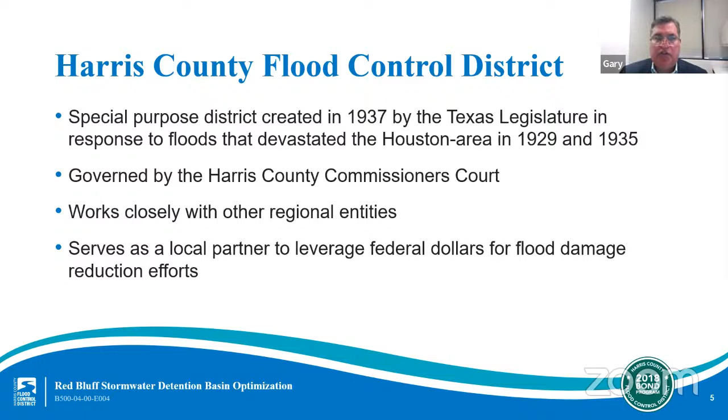The mission of the Harris County Flood Control District is to provide flood damage reduction projects that work with appropriate regard for community and natural values. One of the most difficult challenges we face is constructing effective projects that are sensitive to community and natural values in a highly urbanized area.

Harris County includes 23 main watersheds, totaling approximately 1,800 square miles and more than 2,500 linear miles of channel. 2,500 miles is approximately the distance from New York to California. A watershed is a geographical region of land that drains to a common channel or outlet. Each watershed has its own unique characteristics and needs. The project we are presenting tonight is in the Armand Bayou watershed that is located in southeast Harris County.

Harris County and our surrounding area is flood prone for a number of reasons. Namely, we experience extreme rainfall events, including tropical storms and hurricanes. Our area is largely made up of flat, slow draining land. And we see large concentrations of clay soils that do not soak up excess rainfall quickly.

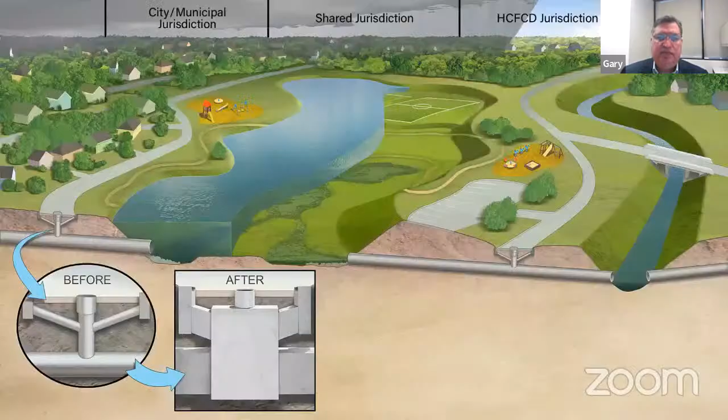While the Flood Control District plays a critical role in flood risk reduction, we are one of several entities involved in these efforts in our region. When rain falls on your roof, it flows through several jurisdictions, such as streets and drains managed by the Harris County Engineering Department, a municipal utility district, or a city, such as the City of Houston, before it flows into a larger channel, creek, or bayou that the Flood Control District owns and maintains. This slide illustrates the various jurisdictions, which sometimes we even share with other entities.

Inside neighborhoods, as shown on the left side of this illustration, storm sewers and roadside ditches collect stormwater runoff and start the process of moving it away from homes and streets. Storm sewers and roadside ditches are the responsibility of the underlying municipality. The larger bayous and channels that take the collected stormwater and move it through our drainage system to Galveston Bay are the responsibility of the Flood Control District. This is shown on the right side of the illustration.

In the middle is a stormwater detention basin, sometimes constructed by the Flood Control District. When storm sewers on the left are increased, this creates an increase in runoff. Since it is our policy to avoid any adverse impacts from our projects, detention basins help to safely take in and temporarily store excess stormwater during heavy rain events. Often, we partner with Harris County precincts, utility districts, and others to add recreational amenities such as trails to these basins and along our channels.

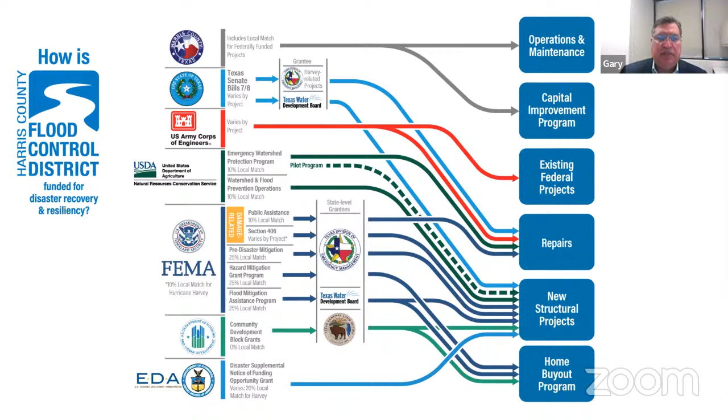We will now move into the part of the program that is specifically about the Armand Bayou watershed and the Red Bluff Stormwater Detention Basin Optimization Project. As a reminder, we are looking for your input as we discuss the project in more detail. Please feel free to drop any questions or comments into the comment box or to comment via phone by pushing the star key.

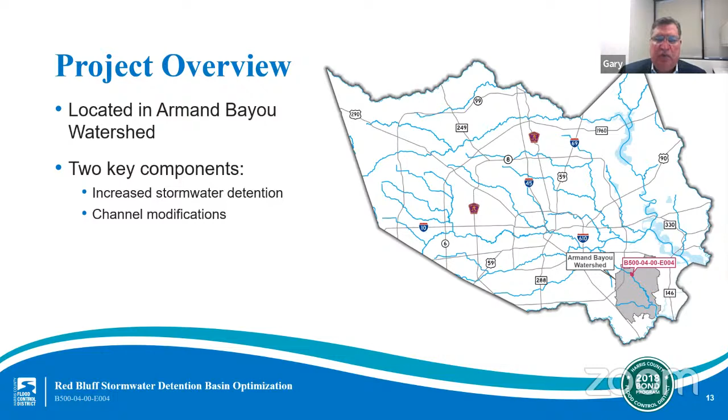This project involves the optimization of an existing stormwater detention basin in the Armand Bayou watershed, the Red Bluff Stormwater Detention Basin, formally identified as HCFCD Unit B500-04-00, in conjunction with potential channel modifications to tributary B115-00-00. The project will examine ways to make the most effective use of the basin in connection with future stormwater conveyance improvements to reduce flood risks in the area. At this point in the project, both components will be examined, but only the detention basin will move forward immediately to design.

Taking a watershed-wide approach to planning ensures that future flood risk reduction projects work together and are sequenced appropriately to achieve the maximum benefits. Planners worked with Harris County, municipalities, including the cities of Pasadena, Deer Park, LaPorte, and Houston, and other agencies, both to clarify flooding issues in the watershed and to improve coordination between flood control district regional projects and future local projects.

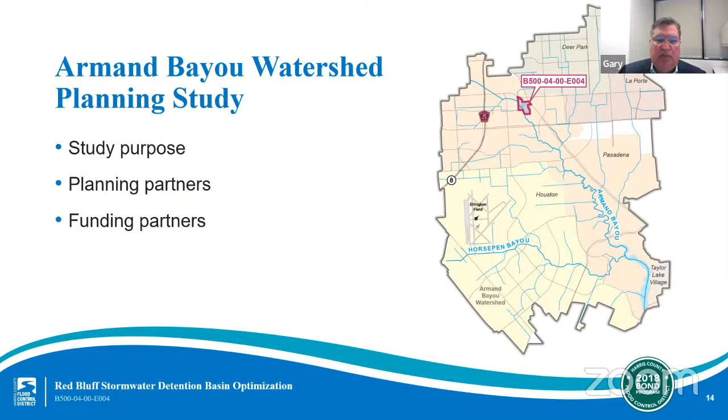The Armand Bayou Watershed Planning Study identified and evaluated 39 locations with significant drainage or flooding problems. The primary sources for flooding of structures in the watershed include a combination of local storm sewer network limitations, limited channel stormwater conveyance capacity, and off-site flow from adjacent subareas.

The study identified 3 major problem areas in the watershed. These include portions of the following subwatersheds: Horsepen Bayou, or B104-00-00, Willow Spring Creek, otherwise known as B112-00-00, and finally tributaries B114-00-00 and B115-00-00, with associated areas of the Armand Bayou main stem, which we classify as B100-00-00.

Once existing and potential future problems were identified across the watershed, the study team refined conceptual solutions for top-tier problem areas to select projects for prioritization. The most promising project recommended for the Armand Bayou watershed focuses on improvements to tributary B115 and surrounding areas, which is what we are here to discuss today. The project includes 2 components: channel modifications to tributary B115 to improve stormwater conveyance, and increased stormwater detention to prevent downstream impacts. Again, we will show this in more detail shortly.

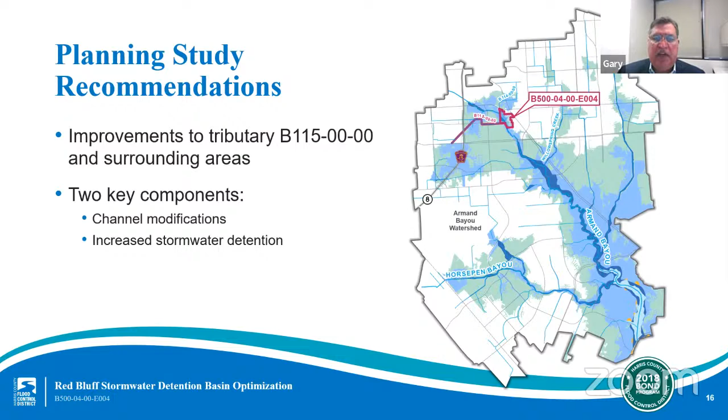Before we do, I'd like to pause and take a moment to provide an overview on these 2 flood mitigation tools. Channel modifications have long been used by the Flood Control District and other entities to reduce the risk of flooding by improving the ability of the channel to move stormwater out of an area. This can be accomplished by widening, deepening, and/or straightening the channel, or by lining the channel with various materials.

Maintenance projects to remove woody vegetation or accumulated sediment can also restore the channel's ability to convey stormwater. Channel conveyance improvement projects often require additional stormwater detention in the form of a stormwater detention basin to reduce flood risks.

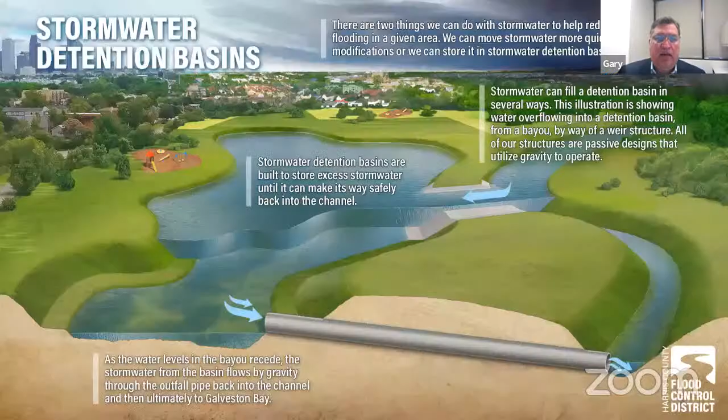Stormwater detention basins provide storage for runoff of floodwaters. This storage is temporarily held and prevents stormwater from overwhelming channels. While channel conveyance improvements move stormwater more efficiently out of an area, strategically located stormwater detention basins temporarily store the stormwater to ensure that the project does not transfer the flooding risk to downstream communities.

When channel stormwater levels drop back down, the stored stormwater drains back into the channel by gravity via outfall pipes appropriately sized to drain the basin. This is important because, as mentioned before, the Flood Control District is a no adverse impact agency, which means we don't allow our projects to reduce flooding risks for one area by increasing them for another. Typically, stormwater detention is constructed first and can provide flood risk reduction benefits on its own. This is the case for the Red Bluff project.

This brings us to where we are today. The visual on this slide shows the typical project lifecycle of a flood risk reduction project. While every flood risk reduction project is unique, they all have a common life cycle. Each project begins and ends with predictable milestones along the way. In the case of this project, the Armand Bayou Watershed Planning Study we just discussed served as the feasibility stage.

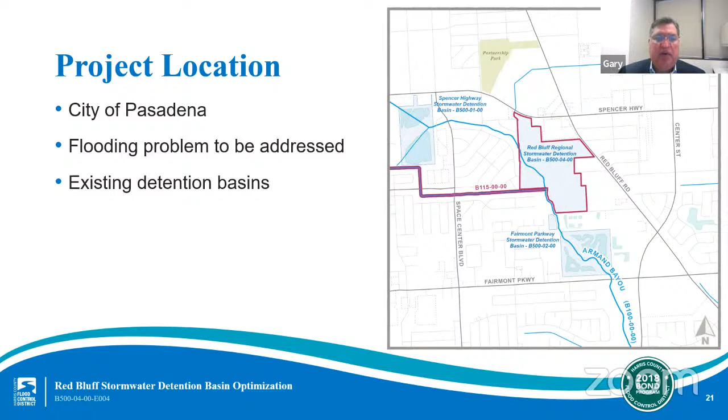Now that we are familiar with the project area, let's dig into details on the two key project components. The first step in the preliminary engineering stage for this project is to identify potential channel modifications to tributary B115-00-00. Our goal for this project stage is to analyze options for expanding channel stormwater carrying capacity within existing Flood Control District right-of-way while minimizing community disruption.

We will also learn what limitations we might have under federal environmental regulations regarding impacts to tributary B115-00-00, which is a man-made channel, and Armand Bayou, which is a natural channel. Based on the options identified for channel modifications, we will then look at ways to optimize the Red Bluff Stormwater Detention Basin to prevent downstream impacts, which is component 2 of the project.

The Red Bluff Stormwater Detention Basin pictured here was built in the early 2000s by the Flood Control District. In this photograph looking northwest, you can see Line Drive in the foreground. During rain events, this basin takes in and temporarily stores floodwater from Armand Bayou. This is a dry bottom basin, and due to its proximity to Ellington Airfield, it must remain as such to minimize the potential for wildlife hazards.

This basin is divided by an easement set aside for a possible future extension of Olson Lane. This easement runs roughly east-west through the middle of the basin. Two separate compartments of the basin function together due to openings across this easement.

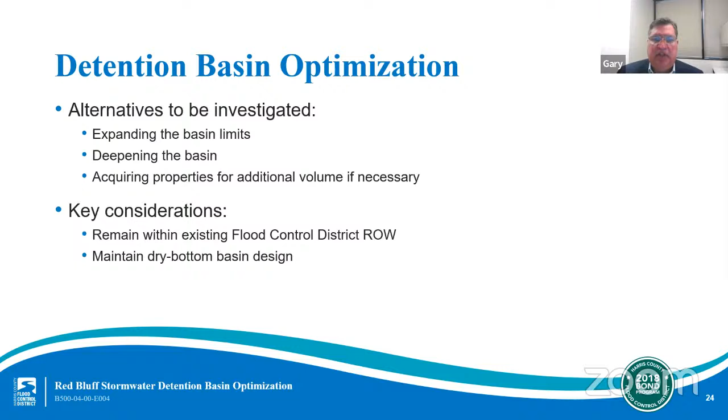The next steps for the Red Bluff project as part of the preliminary engineering stage include developing and evaluating possible alternatives, determining potential utility relocations or property acquisitions, developing cost estimates for design and construction, and preparing the final preliminary engineering report. The anticipated completion date of the preliminary engineering stage is the summer of 2023.

While alternatives for both channel modifications and stormwater detention optimization will be identified during the preliminary engineering stage, the optimization of the Red Bluff Stormwater Detention Basin will be the first component to proceed to the next stage in the project lifecycle, which is design and potential property acquisition.

An additional note, you may also be hearing about a separate Red Bluff Road drainage improvement project led by the city of Pasadena. That is a project to improve road drainage on Red Bluff Road between Lance Avenue and Line Drive. It is one of our partnership projects with Pasadena, partially funded by the 2018 bond program.

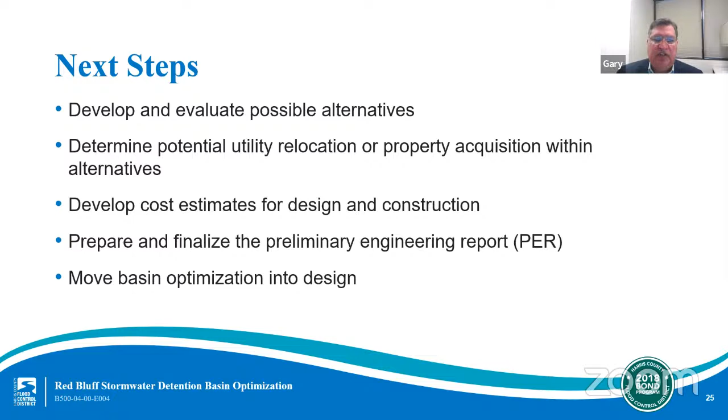I will now turn the program back over to Robert to kick off the question and answer.

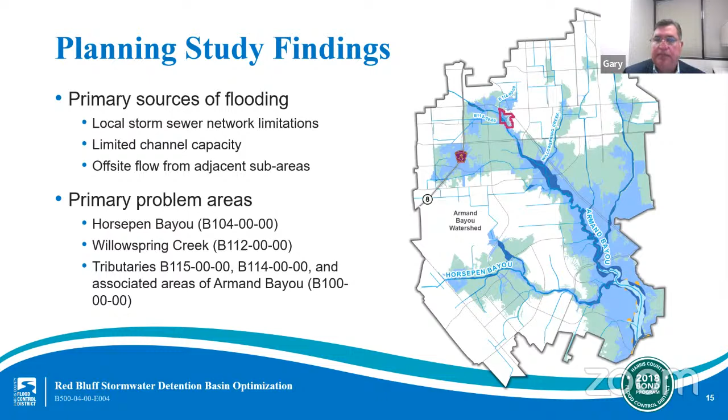All right, thank you. Thank you, Gary. Our next question is for Jonathan. Jonathan, what environmental conditions or issues will be investigated as part of the project?

Oh, yeah, good question. So any typical flood control project will usually entail four major components of an environmental investigation. First is the environmental site assessment, where the environmental consultant would physically go out to the site to look for any contaminants or look for any possible history of land use that would cause contamination in the area. So that's the environmental site assessment.

There's a threatened and endangered species investigation. There's a cultural resource investigation. And then maybe what we mainly talk about in these instances, when we talk about environmental impacts or investigations, is the wetlands and what we would call a wetland delineation, where again, our environmental consultant physically goes out to the site and looks for different signs that would indicate what could be classified as a wetland.

And there's several different types of wetlands, and that gets really in the weeds, pun not intended, to what these folks look into in environmental investigations. But the two main categories of those wetlands that we look into are what might be called overland wetlands, but also there are stream wetlands.

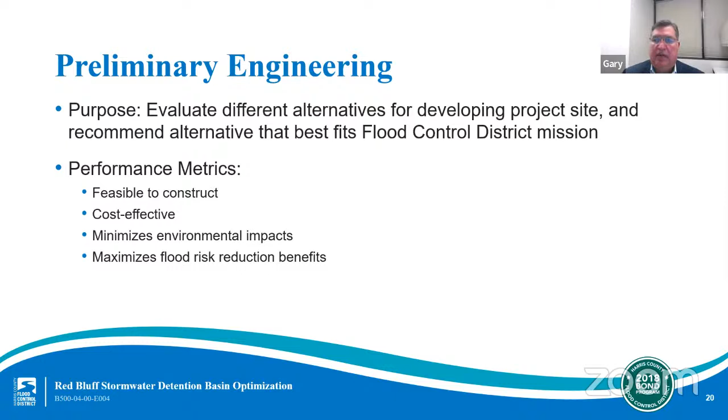All right. Thank you, Jonathan. I just want to say we have received a few questions about other projects, and wanted to let you know that while we are focusing on the Red Bluff Stormwater Detention Basin project tonight, we will answer all questions regarding other projects in writing after the meeting.

All right, moving on to our next question. This next question is for Gary. Gary, will this project eliminate flooding in this area? Yeah, that's a great question. But the answer is it's impossible for us to say or guarantee that any one project will completely eliminate flooding in an area. So basically, when we do these projects, we're trying to reduce the flood risk, and we're trying to study the area, figure out what the flooding problems are.

But as we saw with Tropical Storm Harvey, there's always potential that a much bigger rain event will come along than one we ever planned for. And that's where the risk comes in. So a project that we do, we know it's going to reduce the flood risk in the area, but we can't guarantee that now everything is going to be fixed.

And add to that is that we are doing a project that is going to affect specific infrastructure, but if things don't get maintained in the future, or things happen within the collection system, there's always potential that there could be still some flood risk.

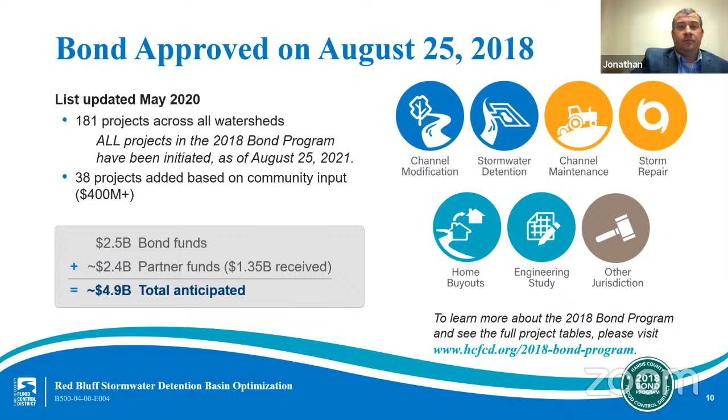All right, thank you, Gary. Our next question is for Gary. Gary, wouldn't it be better to expand the channel first?

Yeah, that question, we touched on that during the presentation, specifically that the project that we're recommending that came out of the feasibility study was a combination of channel conveyance improvements, basically upsizing the carrying capacity of the B115 channel.

But if we were to do that without first building detention, we would run the risk that the project, in moving more water into Armand Bayou, if the bayou doesn't have a way to convey that water safely out of Armand Bayou, we would potentially see impacts. And those impacts would translate as more flow in the bayou and therefore higher water elevations and possibly structural flooding, where structural flooding didn't occur before.

So because we do not allow those type of projects where we're just moving water from one area to another and allowing for an impact, when we do these projects, we have to analyze, okay, if we improve the conveyance in this area, how do we mitigate that water? How do we safely store it or convey it all the way out?

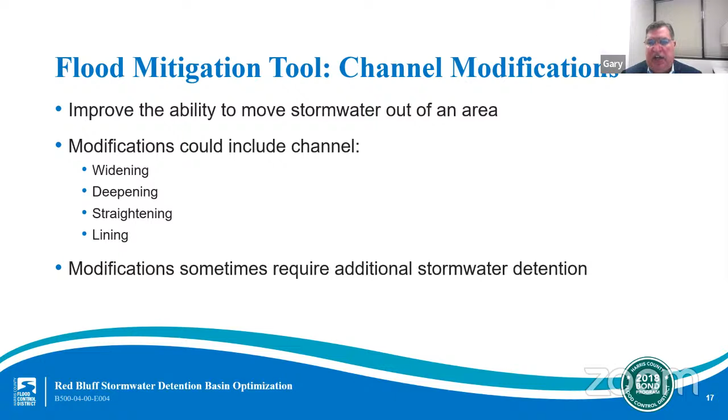So typically, first and foremost, we would love to be able to say, let's just channelize everything all the way out to the outlet of Armand Bayou. But what happens there is the costs of that project start to substantially increase. So in the case of this particular project, we looked at the B115 channel and we analyzed what do we need to do to be able to hit the target flood damage reduction goals that we had.

And then we went in and said, okay, once we do that, what would be the impact to Armand Bayou? And then our engineers go in and say, okay, if that's the impact, what do we need to do to make sure that that impact is reduced down to zero impact? And that's where the detention facility comes in. And so the reason we're doing the detention first is to make sure that the capacity is there so that there would be no downstream impacts, so that once that's in place, we can go back.

It would be great if we could do it in the other order, because most of the benefits come from the channel conveyance improvements. But again, by policy, we can't do that first. We have to put in place the steps to make sure that the project will not create any new flooding or downstream impacts. And that's why we will be doing the detention facility first.

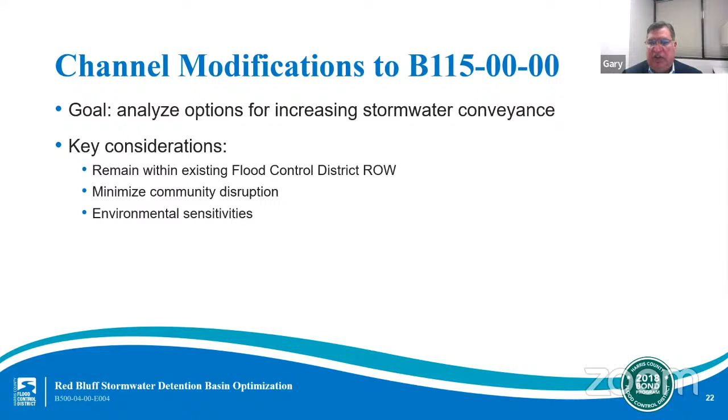All right, thank you, Gary. Our next question is for Jonathan. Jonathan, when will you be able to share more project specifics?

Yep, we'll be able to get you more of those specifics as this preliminary engineering stage comes to its conclusion. The PER is anticipated to be complete in the spring of 2023. Before the PER is finalized and transmitted to Harris County Commissioners Court, we will have another community engagement meeting just like this one. At that time, we'll have identified the alternatives to meet the flood damage reduction goals, we'll have selected one of those alternatives, and we'll be able to share that with the community.

Robert, you're still muted.

Thank you, Jonathan. So our next question is for Gary. Gary, can you explain why this project was recommended over other projects in the watershed?

Yeah, how this one particularly was recommended has a lot to do with the process we went through. So when we did our Armand Bayou watershed study, we knew in the 2018 bond, we had a certain amount of budget to be able to implement projects. And so we went through a process during the feasibility study of saying, let's study the entire watershed.

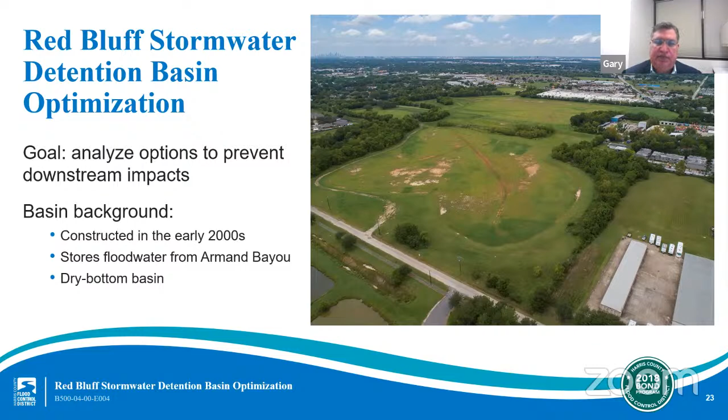All right, thank you, Gary. And with that, I'd like to share one final reminder that the comment period associated with this meeting runs through October 12th, but we're always looking for your input and engagement. We also encourage everyone to get flood insurance, as flood season in Harris County runs year-round.